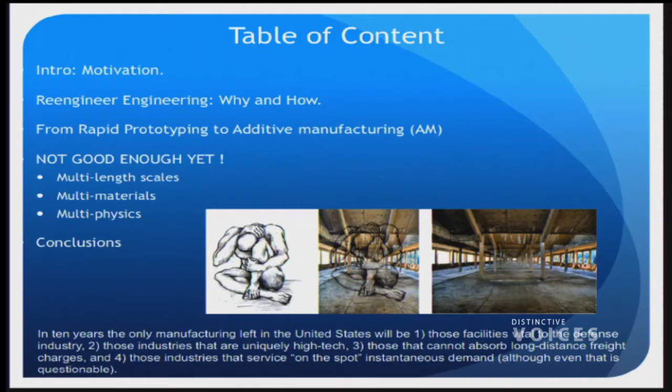And you can see the machine is working here already. You see it's printing a new one of those, right? But you know, we cannot make small or big things in the same object. So it's not multi-length scale, not multi-materials, multi-physics. I will explain more what I mean with that. So it's short right now. It's not good enough. And then I come to my conclusions.

I'm not too certain that I should start with this rather depressing image here. But read with me what people are predicting about the United States and manufacturing in our country. In 10 years, the only manufacturing left in the United States will be defense industry, industries that are very high tech, those that cannot afford long distance freight charges, and 4, those industries that service on-the-spot instantaneous demand. Although maybe even that is questionable.

Think about that. Right? So, my motivation. How did I start getting into this? Well, in 2004, 2005, I was asked by this organization here, WTEC, which stands for World Technology Evaluation, to go throughout the world. We were with 10 scientists from the US, go to Japan, Korea, Taiwan, and try to figure out in manufacturing, micromanufacturing, is the US still leading? Or are we running behind?

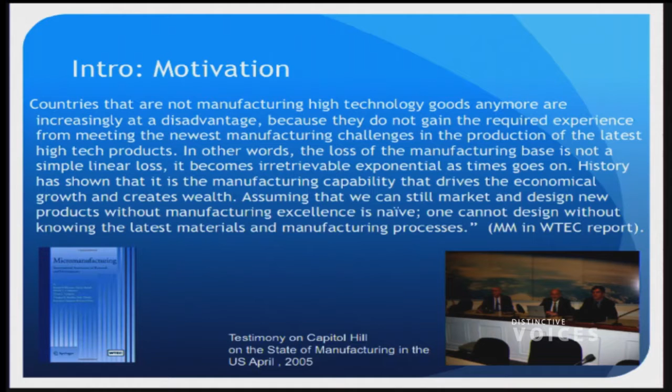The purpose of that is that then the agencies, the funding agencies, know if they should fund more in that area if we are running behind. Right? And so here we wrote a book about our findings. You can find it on the web. And we also testified in 2005 on Capitol Hill. And so basically here is our conclusion. And you can debate that, but that's what we found. And I think it's pretty urgent.

We need action. So countries that are not manufacturing high technology goods anymore are increasingly at a disadvantage. See, they do not gain anymore from the next product implementation. You see what we saw over and over. You would go to Samsung, for example, and you would be brought in a room. None of these products are made in the United States anymore. Sometimes it's already a second or third generation.

And in the US, people would still say, oh, don't worry. We will still design it. We'll still market it. And that's what we say is not true. Because you don't lose linearly, you lose exponentially. And so it's very hard to pull that back once the manufacturing has left your shores. Because the new materials, you gain insight in the new products, that information doesn't feed back to you.

Also, intellectual property is much stronger close to the product than in the inception stage. You know, at universities, we invent something, but it could be 10, 15 years before actually someone physically implements it. And so for all of these reasons, I do believe that manufacturing ought to be brought back on shore.

There's more motivations that have arisen more recently. We all know that Obama's Advanced Manufacturing Partnership has been announced. A first pilot institute was awarded in Youngstown, Ohio. And in the State of the Union address, three new institutes were announced. And so one of the motivations of myself, together with, can you believe it, for the first time perhaps, we have created a coalition that pretty much has all of the universities, all of the national labs unified.

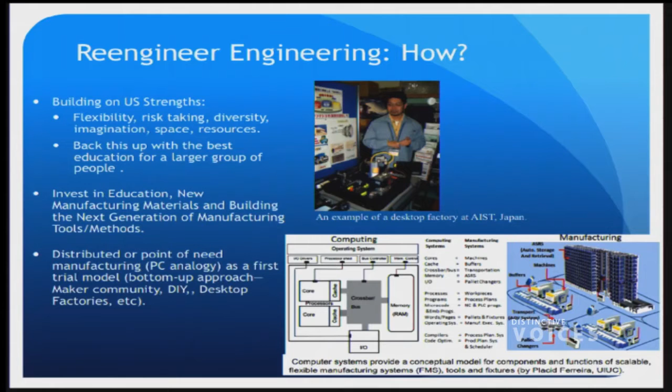And so he feels that it ought to be possible to take the same principle where people used to work on mainframe computers, and there were very few, to a desktop computer. We will do the same in going from huge factories to small desktop factories. That is kind of the concept here. But it will not only be these kind of machines, additive manufacturing, we need more for that. And that comes in my talk a bit later.

So now, I gave you a bit of the motivation. I told you a little bit about how we need to change engineering education. Now we're coming a little bit to the hardware. And here, I will try to simplify a little bit. You don't need to read everything on the board there, because there's a little bit too much information. I want to explain about how this rapid prototyping works before we actually then explain what's going on right here.

And it turns out that there's a lot of jargon out there and all means the same. Rapid prototyping, computer-controlled moldless additive manufacturing, 3D printing, layered manufacturing, digital manufacturing, all of that is kind of based on the following principle. You have an XY stage. You see that stage right here that's moving. Can move in an XY direction. It also can move in a Z direction. And in the Z direction, there's a platform that can move up and down.

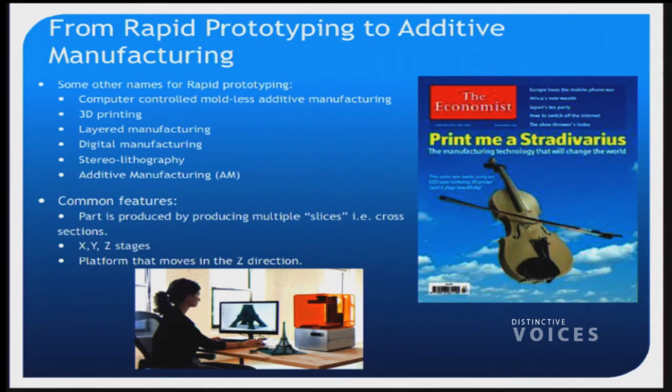All of this equipment has the same simple concept. Before you walk out, go past this little machine there, and you'll see all that there is to it is this platform that can move up and down, and then an XY controller. That's all it is. And that allows you, maybe some of you people remember that, this was a cover of the Economist. This thing was printed. This is a violin, a Stradivarius, and it plays. The part that was not 3D printed, strings, thank you. You got it.

We will start with the very simplest method for us to make one of these 3D shapes you're seeing. And by the way, this is all indeed about 3D printing, right? So instead of printing your business card, look what I have here. This shape that it's like a puzzle, can do all of these 3D movements. This is printed in one go. So this did not need to be assembled afterwards. So this additive manufacturing does things that there's no way you can do with other manufacturing. So I'll give this around. Ed, can you catch this? There we go. So this thing was printed with this machine.

And how does it work? Well, I'm kind of really lucky. I have this machine here, and here, and here, right? And so, for one, you see this platform here. That is the platform that can move up and down. And then do you see these plastic wires here? You have two in this case. In this machine, I only have one.

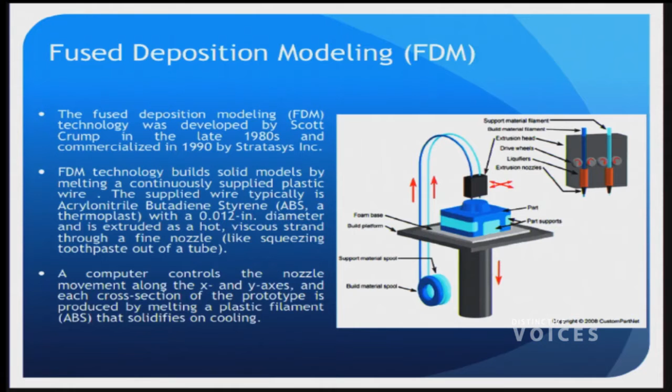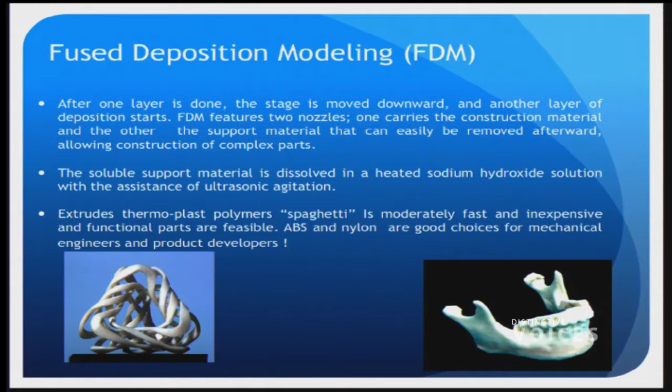And this thing, we are printing structures out in 20 minutes, an hour. Not bad, right? So fused deposition modeling. Think about it a little bit like toothpaste that you're squeezing out, except in our case, it's these wires that we heat and put on a substrate layer per layer per layer, right? You got that one? Good.

Next one. Oh, but by the way, before I go there, is there machinery out? Yeah, expensive machinery and cheap machinery. Like this one is an expensive one. Could cost about 120,000, 140,000. But then we have machinery that does the same, that costs about 5K or less. So I don't know, Ben, how much does this one cost? 1,500, right? So still an expensive printer, but not that expensive anymore, right?

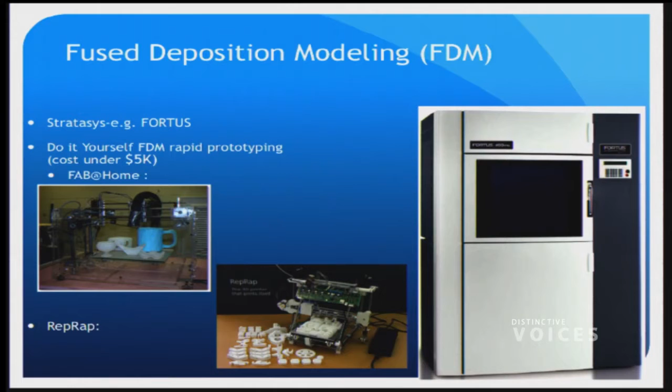By the way, one of these printers replicated itself recently. Well, not that recently, May 2008. That's true, you're laughing. That's the parent and that's the child right there.

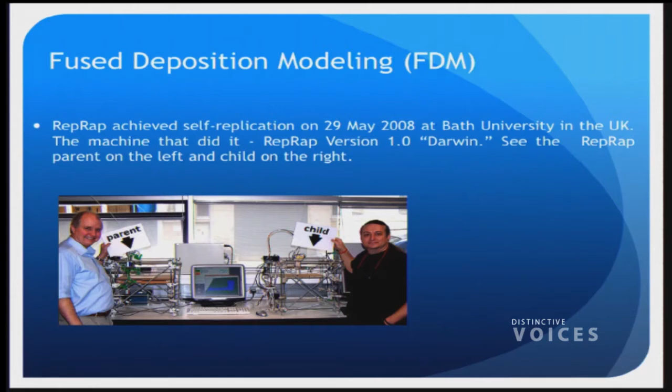Okay, now we go to the next one, right? 3D printing, 3DP. How does this one work? Okay, Z-Corp, good, but it's been bought up, because things are going fast in this field. How do we do this? So before we had this plastic wire. In this case, we have a powder. And the powder is in this reservoir right here. I bring this piston up, and then some powder that spills over is brought with this roller onto this movable platform. Same platform again like there.

But now, what I do, I come in with an inkjet printer with a little bit of glue. And the inkjet printer will only glue the powder together where it needs to make a solid shape. And so again, it does it layer by layer. The inkjet printer goes over the shape you're drawing this layer. I lower the platform, more powder, do the next one, and I draw anything I want. Look, you see here how the shape comes out of the powder, out of the machine, right? And many of these shapes are shown right there.

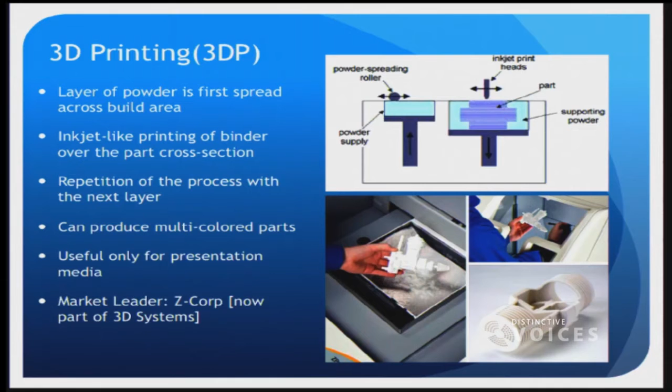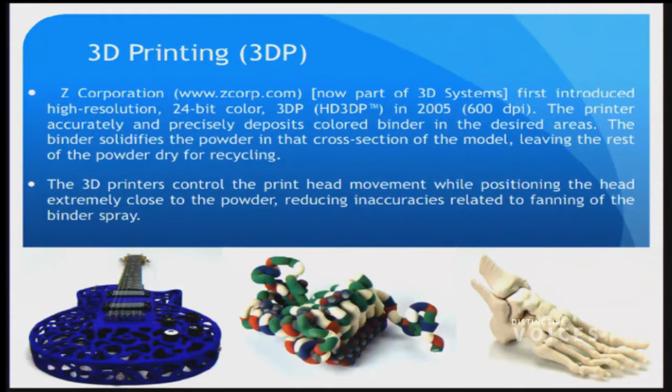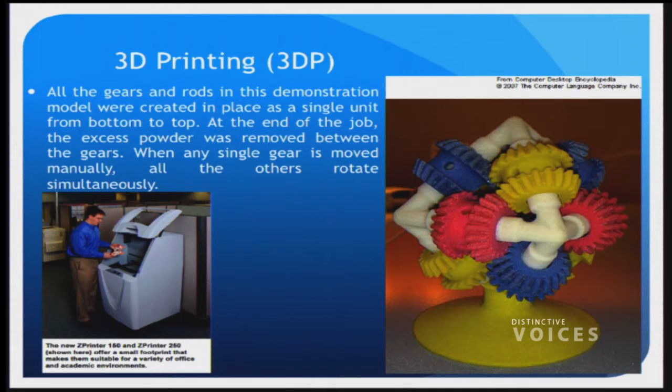This is good for colored kind of shapes, like this guitar, these molecules, these feet. This is all made with this 3D powder printing, so to speak. So wires, powder. Oh, and by the way, the last kind of slide on this, this is all made in one go. Can you imagine that? And you push one wheel, all of these wheels start moving. Imagine making this with any other technique. Unimaginable, right? You couldn't do it, right?

So now, third one. So you remember first one, squeezing out the toothpaste. Second one, the powders that we glue together with this glue. The third one is perhaps the most sophisticated one and has the most future to be extended in big shapes and very small shapes. It's called stereolithography. How does this one work? So instead of a powder or these wires, I now have a clear, transparent liquid, but that liquid can be solidified by a laser. So if a laser hits that liquid, and again, always the same thing, you have a platform, now the laser beam hits, let's say, this point, it solidifies the liquid, it becomes solid.

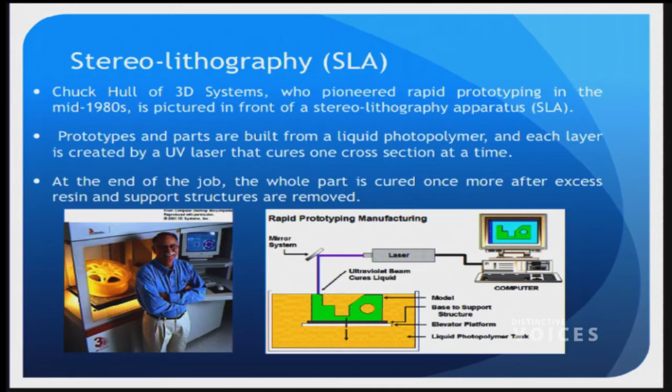That is, right? You can see on the date, actually, mid-1980s. Huh? Exactly, yeah. And so this technique allows you to write in 3D in this polymer liquid. You will see that there's a tremendous amount of new development on this technique, making it possible to go to the nanoscale. We will actually show that with this kind of equipment, the latest format of it, you can put little statues on a human hair with all of the resolution you can imagine. And that's not old.

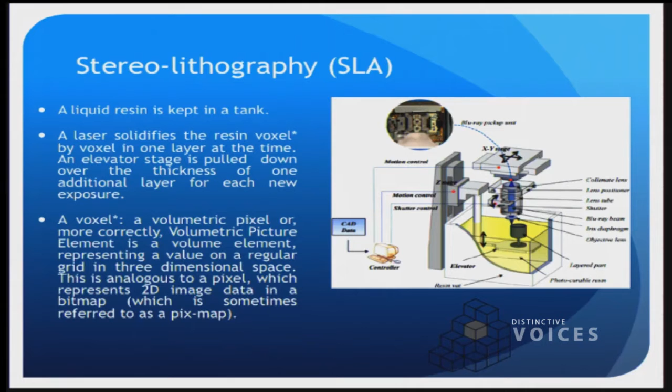No, absolutely not. But so you see the principle here, right? So we have this vessel full of liquid, and again the platform, always the same, right? A platform, and then an XY stage that solidifies or melts, and then you move the platform down, a new layer comes in, you draw on that layer, and there you go.

So now you kind of saw the typical thing that happens in the chemistry class, right? The chemistry professor has one test, and it always works when he does it by himself, right? But you must say we had like an 80% working here.

So you saw a demonstration, and it's still ongoing, of an actual 3D printing with one of the three techniques of printing I told you about. Do you remember them? So one, FDM, right? Fused deposition modeling, which is with these wires. The second one was powders, and the third one is in that vessel, right? It's a liquid that you solidify with a laser. Now, remember what I'm going to tell you, it's not good enough. This will not bring manufacturing back to the US.

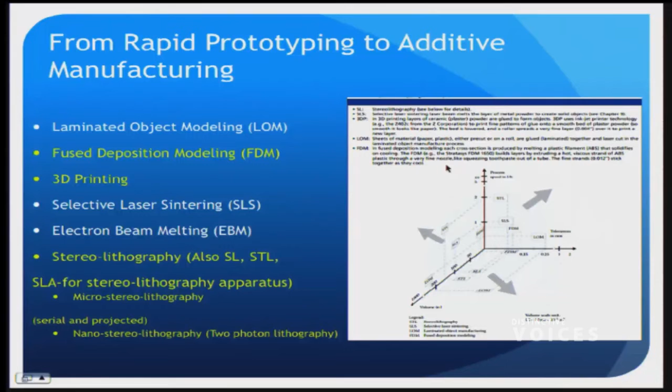Oh, yes, but you remember, I cannot cover all of these. There is, look at this. All of them are on there. E-beam, laser sintering, right? So on purpose, because we don't have much time, I selected those three examples, okay? Good.

So now, look at this curve. This is a hype curve. And many people say now that 3D printing is right here on the top of the curve. And they might be partially right. We have to be very, very realistic. Because today, we don't have many materials that we can feed these machines. So we need to develop more materials so that instead of prototypes, these are functional. You remember my bottle opener? If it breaks when you work with it, it's not functional, is it? So we need to develop new materials.

That's one thing. We also need to make it multi-length scale. What that means is I need to be able to do very small features, let's say nanometers, and go all the way to decimeters, right? That's multi-length scale. Third, maybe the most important one, I need to do multi-physics. This is all additive manufacturing, meaning I add material. But we think we also need subtractive. We need to perhaps polish it afterwards. So we need to bring different physics together in one manufacturing machine.

Our vision is that for the United States to get back in manufacturing, we need to get back into the hardware. It's developing these new manufacturing tools that can do these things that we're talking about here. Multi-length scale, multi-materials, and multi-physics.

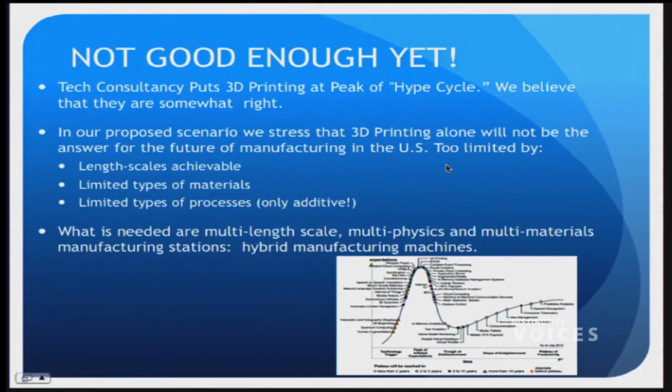Also not good enough for another reason. This is not the first time people have been thinking about desktop manufacturing. It turns out there's actually 3 different communities out there in the world that have separately developed such a concept. There is something on the right here called Desktop Factory. Desktop Factory was developed mostly in Korea, in Japan, some activity in Germany. There was only one built in the United States. What's the concept there? You all know your computer numerical controlled machinery to machine metals, lathes. Often you use these huge 1-ton machines to make a part that's that small. The concept is, don't do that. Make it into a desktop factory. That was one community, mostly mechanical engineers doing that.

Then what you heard about today is this additive manufacturing, 3D printing, like we are doing here in front of you. That's another community. A lot of people there are maybe more material scientists. They don't talk to each other. These are different communities. And then in the middle, interestingly enough, is yet another community. Electrical engineers are making mini clean rooms. So instead of having to go into a clean room, the clean room is this size. People stay on the outside. And instead of using masks, they have digital light projected chips that do the exposure of the photoresist.

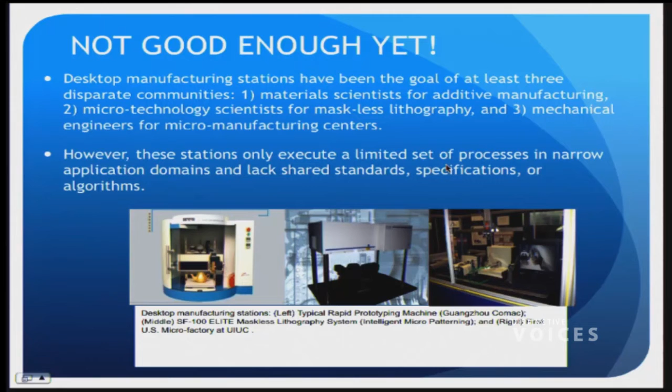So our vision is the physics and the operation of these 3 things need to come together. That's when I talk about multi-physics. We call that hybrid manufacturing platforms, where you combine some of the features of these different platforms in new machinery. And so today, these stations execute a limited set of processes in a narrow application domain, and they lack shared standards. You know, there's no software across these platforms.

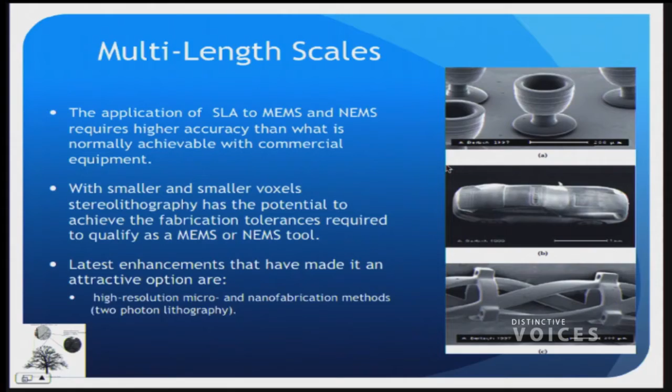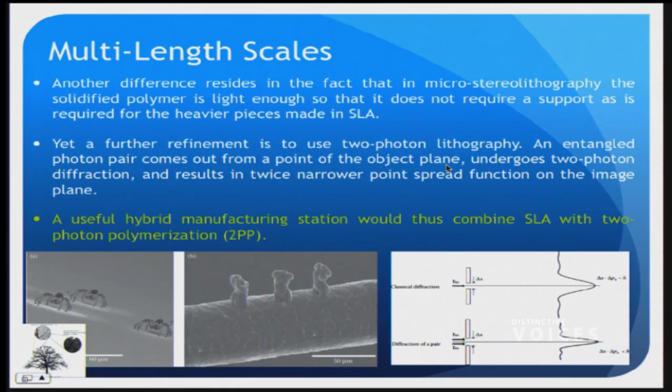The idea is if 2 photons, let's say 2 photons of 800 nanometer in wavelength, hit a dye molecule in your photoresist or in your vessel with your polymer at the same time, they act as a photon of 400 nanometer, double the resolution. And so we can write directly in that 3D bath and write anything, these spiders, these kind of things. So we have gone from nanometers to microns to millimeters to centimeters. Multi-length scale. We need to be able to do that before we will have real manufacturing stations that serve a broader purpose than the current additive manufacturing allows us to do.

This is a machine, I'm not going to go into detail, we call it DIMP, it means Desktop Integrated Manufacturing Platform. It's where we combine the stereolithography from the 80s with the two-photon lithography from today, and that way achieve multi-length scale.

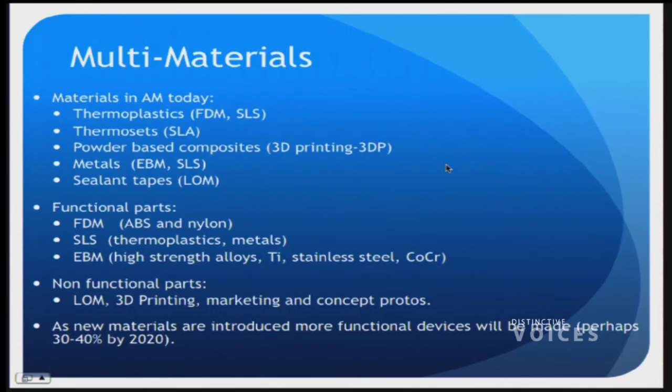Materials. You already noticed that we can print some of these plastics out. We have certain powders that work. We have that polymer bed that you can solidify. But most of these materials are not strong enough. Like my bottle opener, most of the time it will crack, it will break. So there's a tremendous need for material studies, way beyond the ones that are currently used, to allow this number of real products. You remember I told you there's perhaps 10%. If I go back to this number,

I think my battery is off.

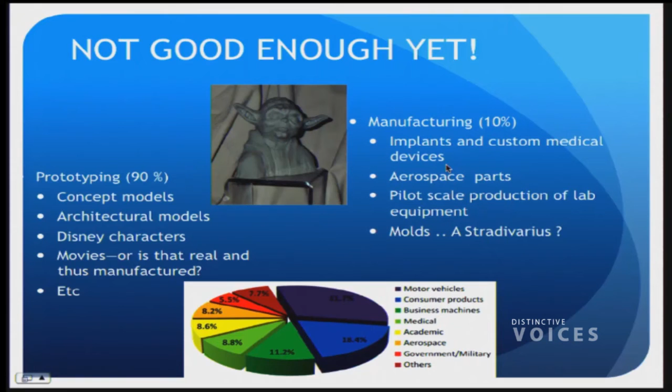It says 10%, right? If we can develop new, better materials, we perhaps can bring this to 30 or 40% of functional goods. So that would help in real manufacturing products. Turns out there's actually something magical about this 3D printing and an additive approach that allows us to make new materials. So not only do we need to provide new materials for the current equipment, this kind of equipment allows us to make architectured material. Some of you might have seen this metal here. This metal lattice is the lightest metal lattice ever made.

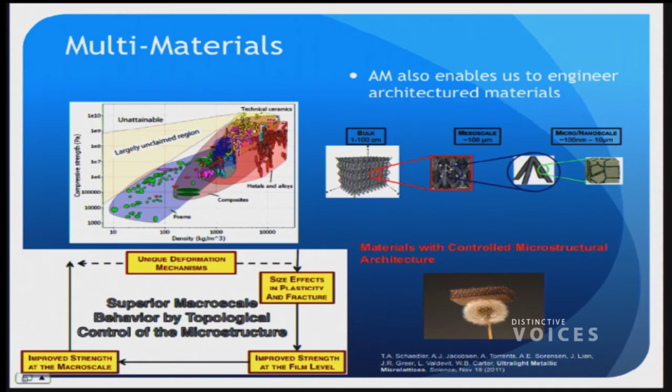Thank you, Ed. I said, how does that work? I got some help from the audience here.

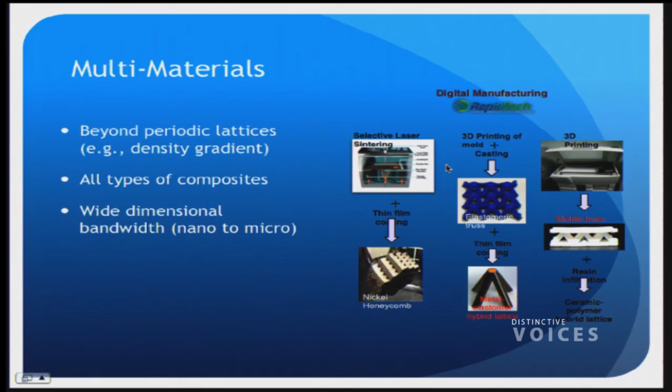Now, how do you make that material? Well, you actually make it with additive manufacturing. So now imagine that you have a metal, instead of one density, I can give it a gradient. I can make it more dense at the outside and lighter in the middle. So I can make architectured or structural materials. So it kind of goes both ways. We need to make more materials to feed into these machines. Then these machines can make us other new materials, structured, architectured materials. We also need to develop things like composites to widen broadly the application range of this 3D printing.

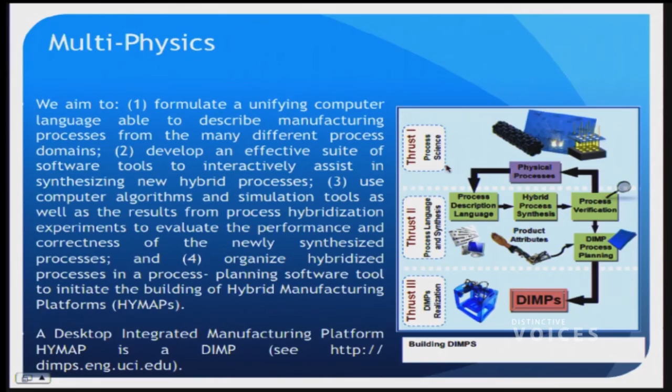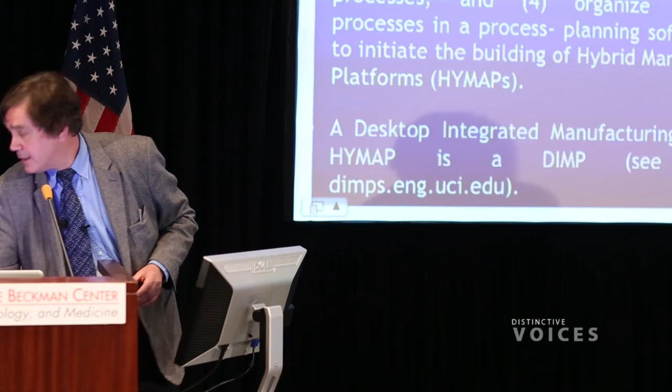Thank you. This will help for my conclusions.

So I hope you've learned some new stuff tonight, right? At first, I told you this kind of dire picture of the US needs to get back into manufacturing. Then I told you we need to work on education. We need to change the mood of the country in terms of making physical things is a good job. Manufacturing is not a bad thing. And actually, manufacturing will require a higher level of education than it used to, because it's much more integrated with

design. Then I told you, well, there's this 3D printing that's today on the top of the hype curve, right? And maybe it will do a lot of good things, but be careful, right? For three things. So you remember them? Three things we are falling short on. Not enough materials to make functional goods. The next one, multi-physics, right? And the third one, so multi-materials, multi-physics, multi-length scale. I don't know if it was you or you who answered, but you're right, multi-length scales.

If we do that, then imagine the following world. Advanced manufacturing at the point of need. In the hospital, you need a knee implant. And you're on the bed. You don't want to wait for a week on the bed, right? It doesn't fit, so we need to retry it. That's a good example, right, of point of need. Military, a ship that breaks down, like recently that disaster. Military in general. Point of need is a good first initial place to try these things out.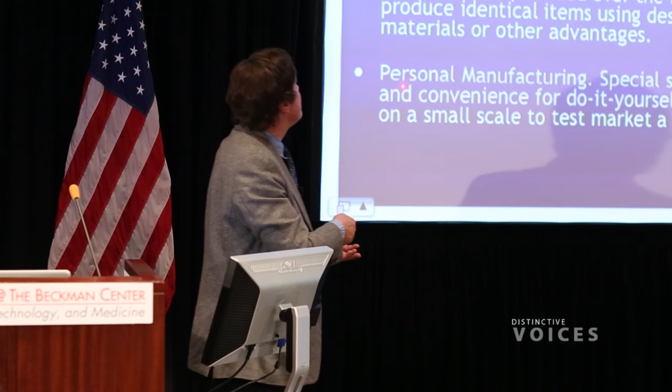This third bullet point is kind of thinking about the internet. You can well imagine that within California, we have this 3D printing station that does, let's say, you were talking about laser sintering. You need a metal part. And then that part has a certain specification. Over the internet, you send that specification to the other facility that can do that kind of manufacturing step. The part is shipped there and finished in that place. So that's like a collaborative effort that could go very fast because we all work from the same specifications, same software, etc.

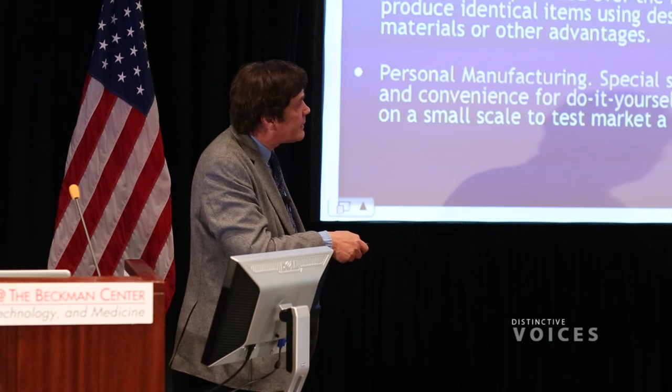So I hope you will all encourage people you know around yourself, family, children, to get into this area, to not be totally enamored with everything virtual, just programming. Tell them there's something good to be said about making things, and find fun in making things.